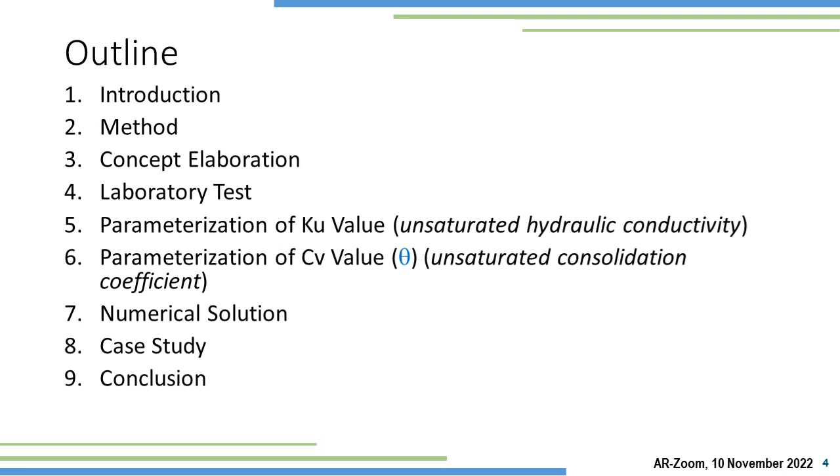This is the outline of my presentation: first introduction, method, and till conclusion of this research paper.

This is the background of my paper. Consolidation theory, Terzaghi 1943, is commonly applied at saturated soil, which is associated with a pore media layer under groundwater level. In fact, actual conditions show that the consolidation phenomenon also frequently happens to unsaturated soil.

The parameter that is frequently measured at the vadose zone is water content, and we need to relate the water content parameter to know the configuration of consolidation value at the zone above groundwater level.

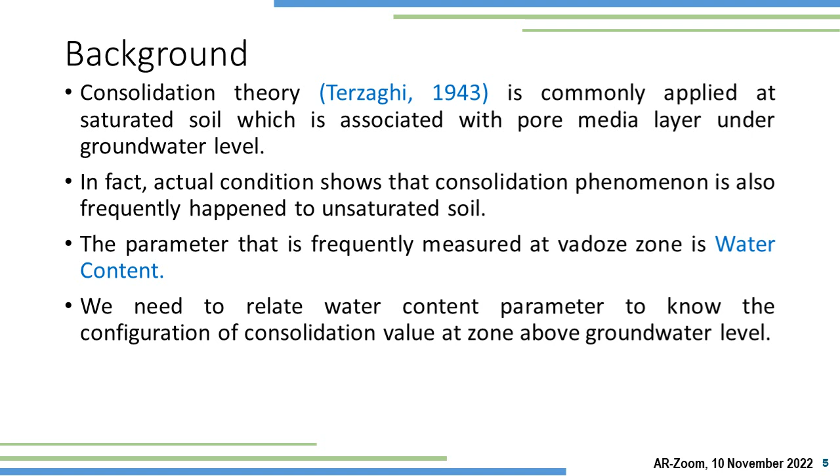Next, this is the problem framework of my paper: loading is considered constant in the frame of constant total stress. Constant loading is considered to cause air to dissipate earlier than water, due to air compressibility being more than water compressibility.

Water dissipation is gradual, and temperature effect is ignored in this study. Air dissipation causes air to come out of the unsaturated zone, slowly and gradually turning the unsaturated zone into saturated. If water saturated condition is achieved, water dissipation will happen, and this is called saturated consolidation based on Terzaghi.

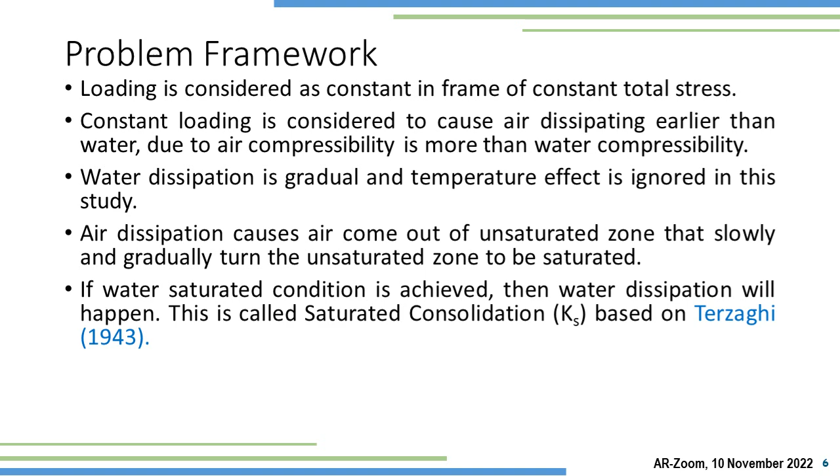This is the objective and also problem restriction of my research paper. From the objective, first is to apply Terzaghi's saturated consolidation theory at unsaturated media; second, to formulate an initially nonlinear consolidation coefficient at the unsaturated zone or soil; and the third is to know the correlation between infiltration phenomenon and consolidation theory.

Based on the problem restriction, first, the consolidation equation used in this study is one-dimensional, a vertical approach along the z-axis, adopted from the Terzaghi equation. Water dissipation is not evaluated in this research, and water dissipation is only influenced by loading and infiltration. Lastly, the volume change coefficient is not varied and is set to one value, which is 0.75.

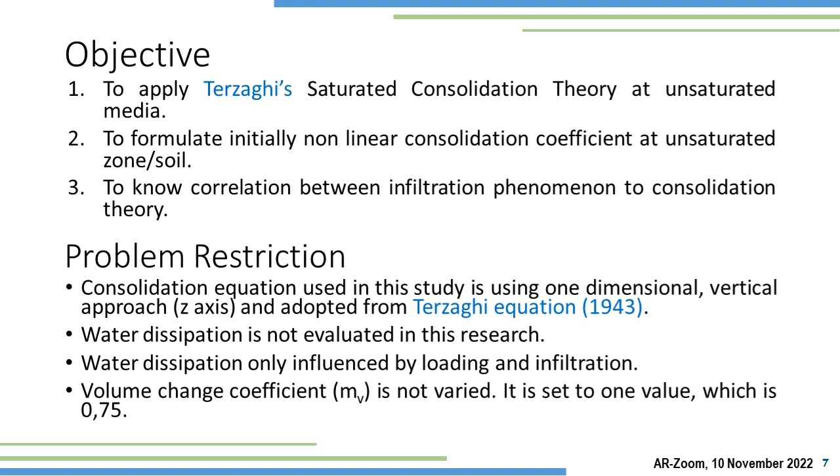This is the research method of my paper: preliminary formulation of a nonlinear consolidation coefficient for unsaturated soil. First is concept identification, next equation and parameter adjustment, next we did laboratory tests and modeling with three types of modeling: conceptual, mathematical, and numerical. Last, we have the conclusion for the research.

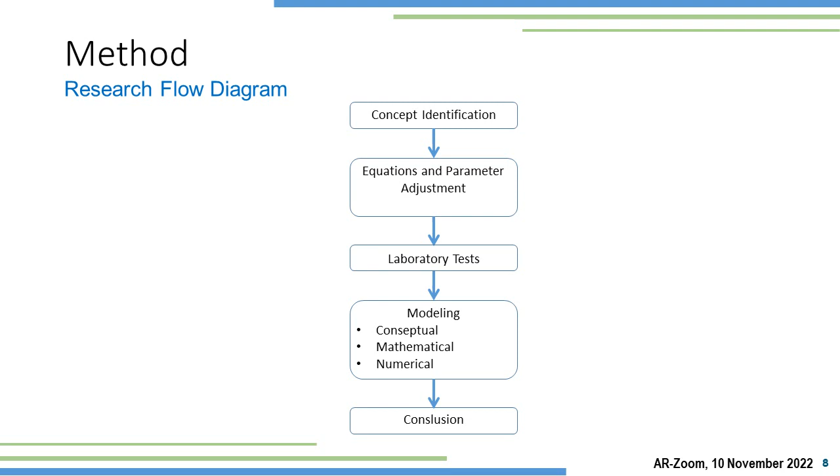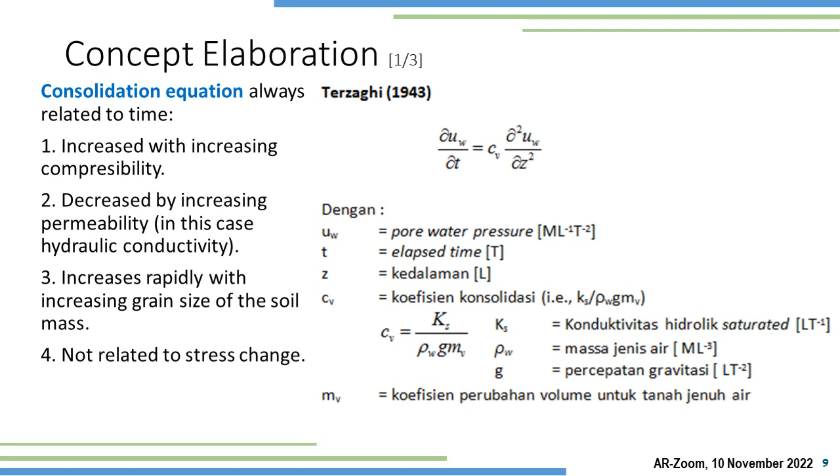This is the concept elaboration of my research paper: the consolidation equation is always related to time. First, it increases with increasing compressibility. Second, it decreases with increasing permeability, in this case hydraulic conductivity. Third, it increases rapidly with increasing grain size of the soil mass. And fourth, it is not related to stress change.

Based on the concept elaboration, I propose this conceptual model of unsaturated consolidation. From the unsaturated consolidation to the saturated consolidation, we can see at Figure 1 in the PowerPoint presentation.

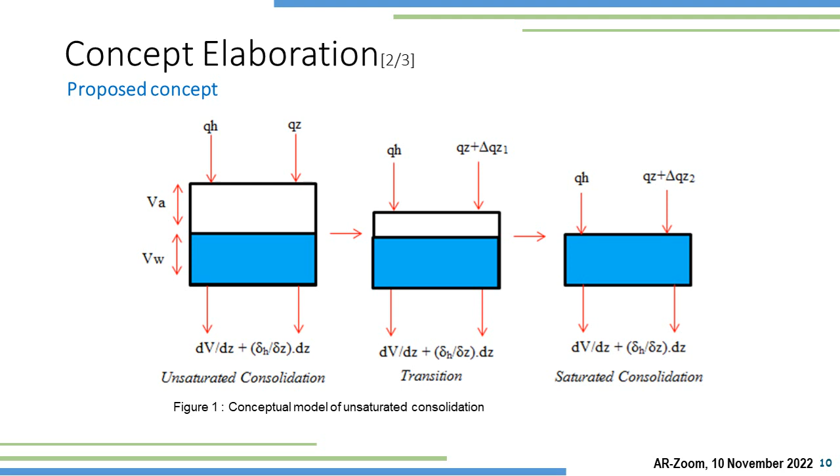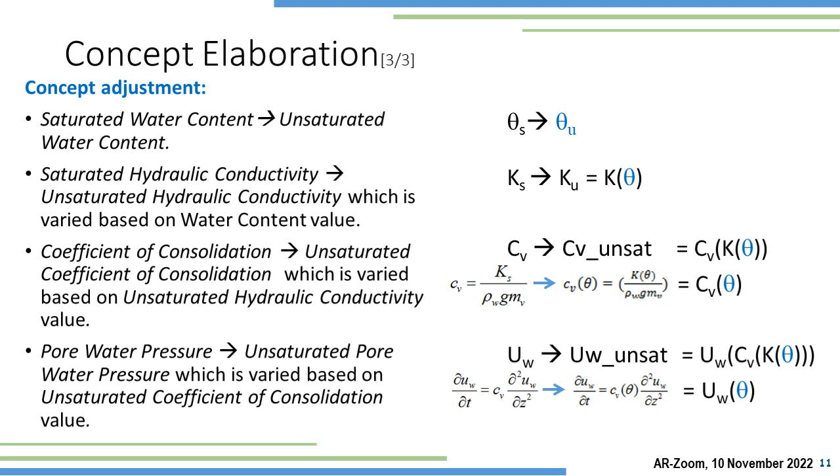These are 4 laboratory tests used in my research: physical test, clustering test, pF test, and infiltration column test. In physical test, we did filtration analysis and hydrometer, moisture and water content test, and hydraulic conductivity or permeability coefficient test.

For clustering test, we did grain refinement, grain size sorting, equivalent to sand, silt, and clay. For pF test, we did measurement of water content distribution based on negative pressure or suction. And for infiltration column test, we did observation of water content distribution from infiltration simulation.

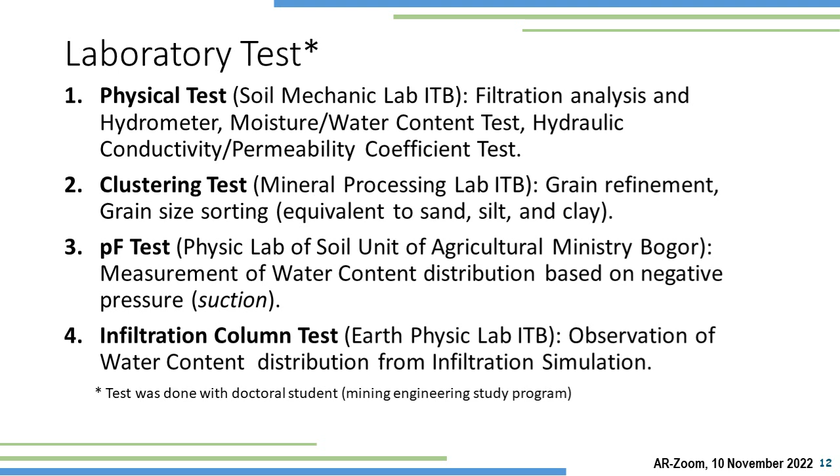Based on this slide, we can see the parameterization of unsaturated conductivity hydraulic value based on the water content and pF. And in the chart, we can see that the unsaturated conductivity hydraulic is close to 1 for the R square.

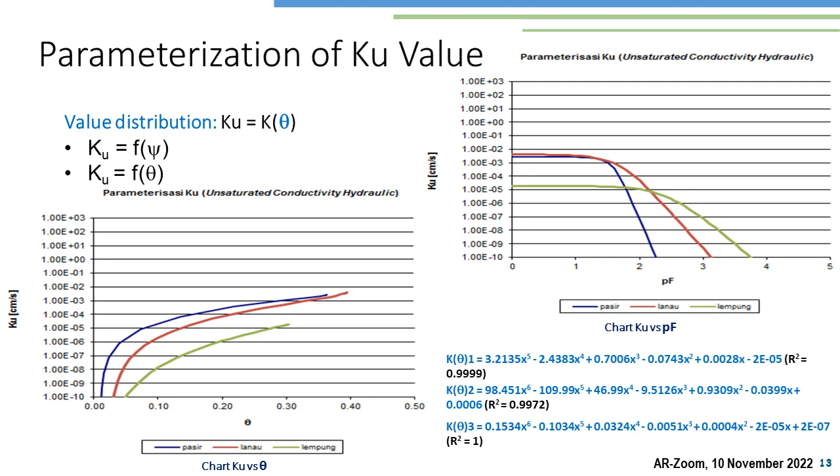This is the parameterization of unsaturated consolidation coefficient value for the materials based on the water content.

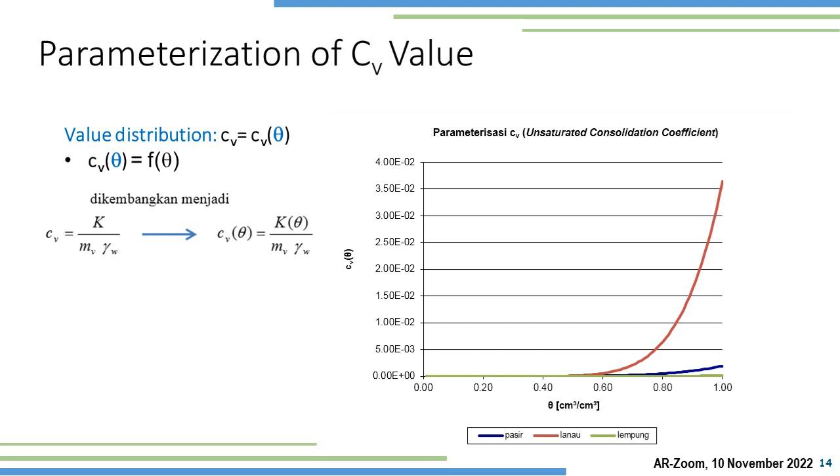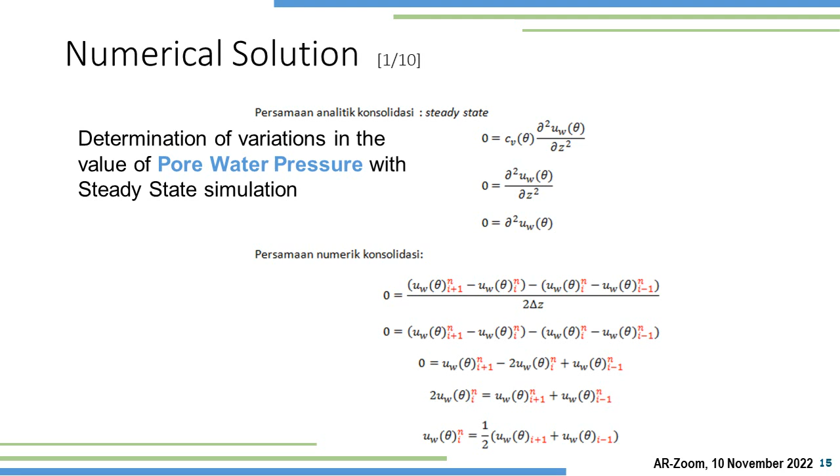In this slide, we can see the numerical solution for my research paper. The first is the determination of variation in the value of pore water pressure with steady-state simulation. And this is the determination of variations in the value of pore water pressure with unsteady-state simulations.

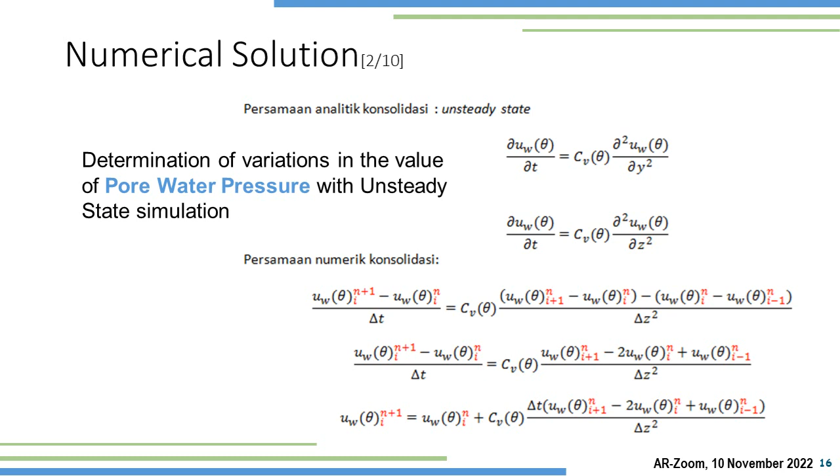And this is the pore water pressure distribution calculation table, spreadsheet table with initial condition in unsteady state with Dirichlet distribution at the surface and at the ground.

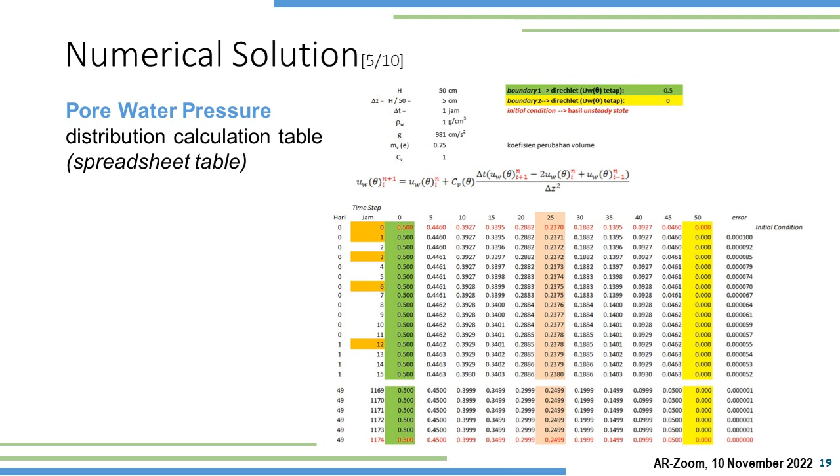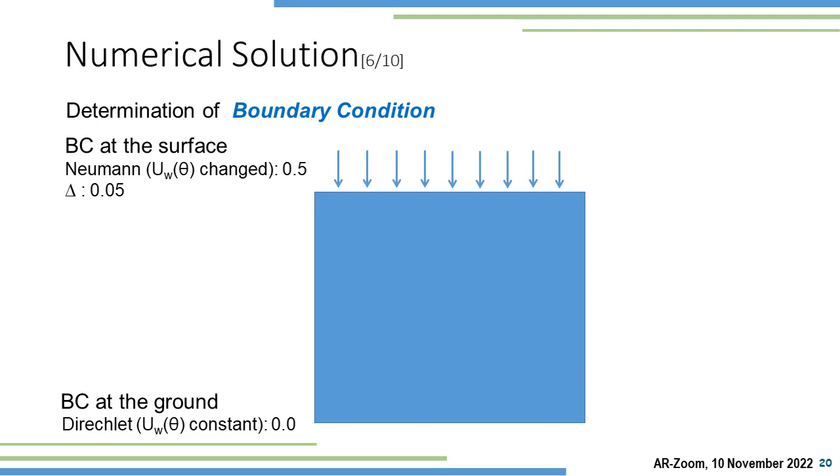And this pore water pressure distribution calculation table, spreadsheet table with initial condition in unsteady state condition with Neumann distribution at the surface and Dirichlet distribution at the ground.

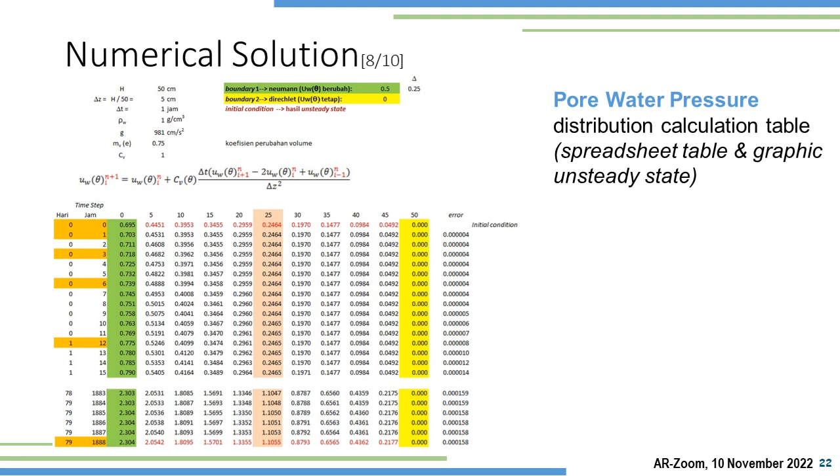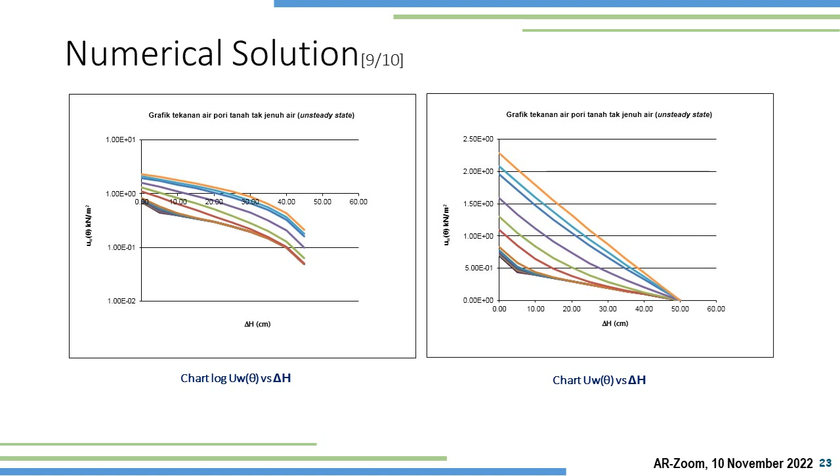In the chart of numerical solution, we can see the unsaturated pore pressure chart with delta H on the x-axis for unsteady state condition. And in this chart, we can see that the unsaturated pore pressure chart is different from the previous slide.

In this chart, we can see the unsaturated pore pressure chart with delta time on the x-axis for unsteady state condition.

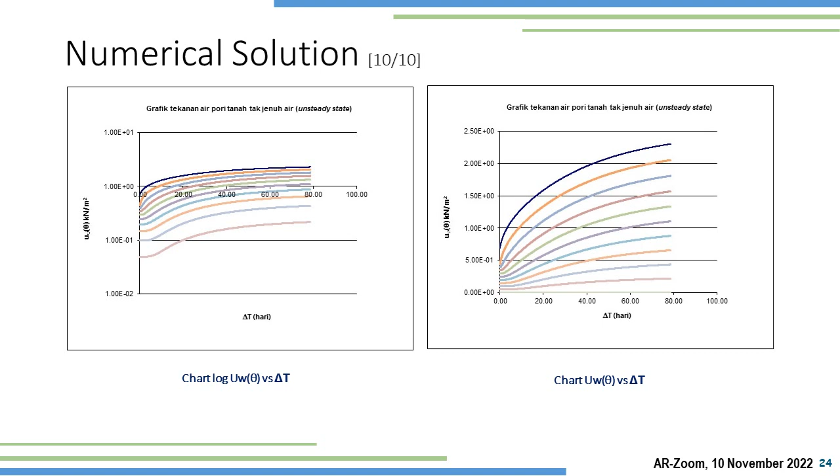In this case study, we are using the clay equivalent materials. In this picture, we can see the chart of unsaturated conductivity hydraulic and unsaturated consolidation coefficient with different water content for equivalent materials.

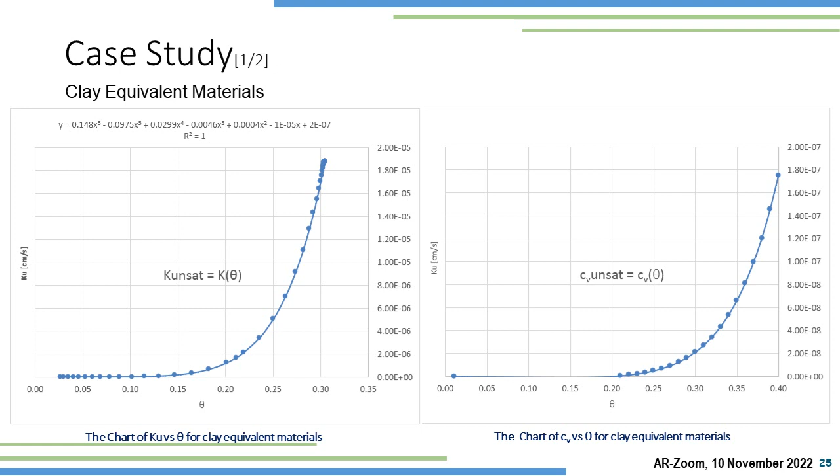Based on case study, we can say that generally consolidation occurs in cohesive soil layer or clay, where clay soil has low permeability, so that pore water takes a relatively long time to dissipate due to loading.

And from the description of the conceptual, mathematical, and numerical model of the clay soil case study, it can be concluded that the value of the consolidation coefficient is directly proportional to the value of the hydraulic conductivity, influenced by variation in the distribution of water content in unsaturated soil.

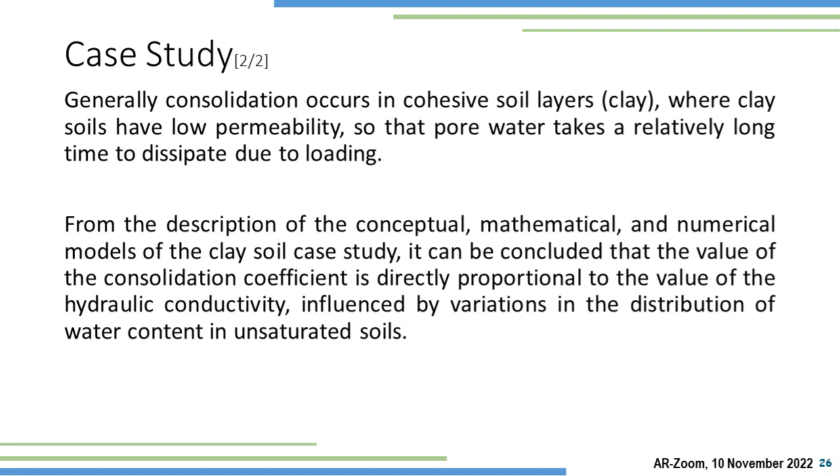Based on this research paper, we can summarize that Terzaghi's consolidation concept with a one-dimensional vertical approach can be implemented in unsaturated soil, and variation of pore water pressure is dependent on the water content in the vadose zone according to the characteristic of the porous media material being reviewed.

And last, an increase in the distribution of water content value during the infiltration process results in a proportional increase in the value of pore water pressure, which can be analogized as a negative consolidation phenomenon.